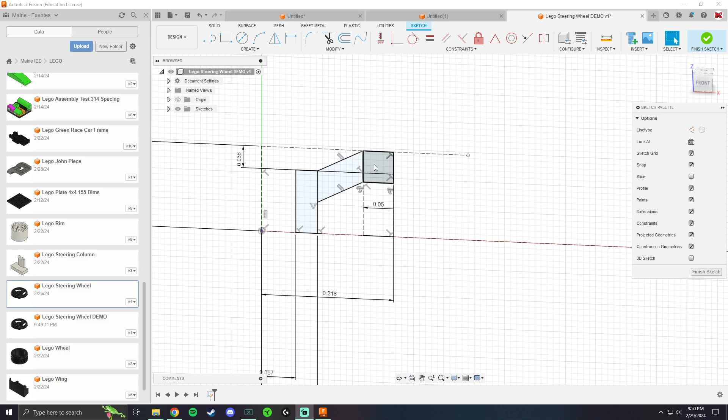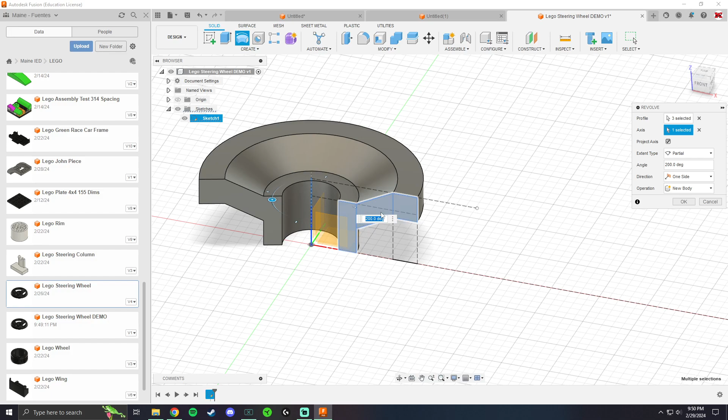So if I hit finish, let me turn my sketch back on. If I go to revolve, I'm going to be selecting all of these as my profile. My axis is going to be that center vertical one. So then here you go. If I rotate this back, you can see all this blue area, it's becoming that. It's giving me the slope, so I can get that bowl effect. Turn this back to 360.

Now, after this, I'm just going to give it a quick fillet. Let's see, on this side, 0.05, perfect. Now, I'm going to be talking about the circle pattern here.

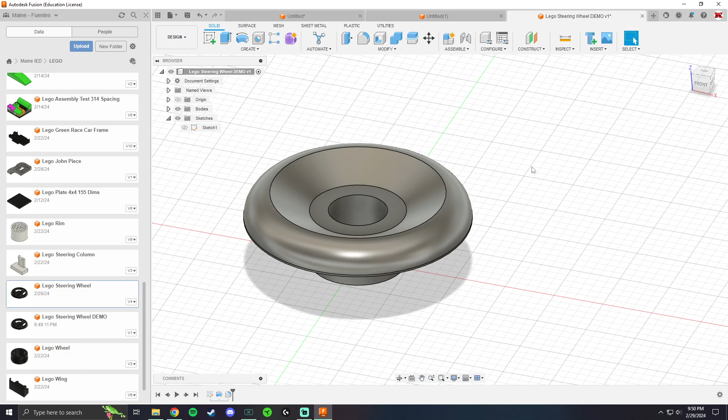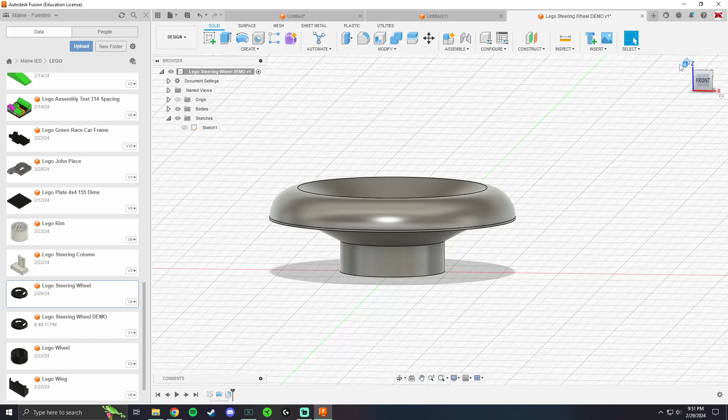So with that steering wheel, there's kind of three sections that are cut out to resemble a real steering wheel. Now we could do this on either side, bottom or top. And all we're going to do is kind of cheat the system. Basically, we're going to just make a profile, a sketch that's perfectly flat here at the top and just cut down. So I'm showing you a hack to cheat the system, but also using the circle pattern. Now, I'm a big fan of using it on the bottom because I think it's a little bit cleaner, but feel free to do what you want. There's no right or wrong way.

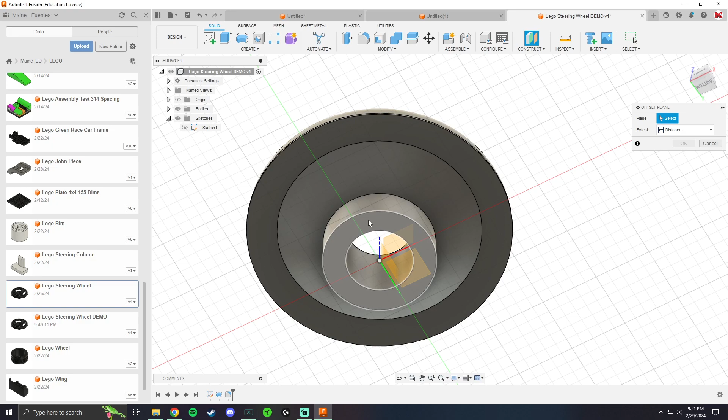Now I can do one of two things. I can definitely make a sketch and go right on here. But I think to really help us visualize this, I'm going to make a plane. So if I go to construct, I'm going to do offset plane. I'm going to click here on the bottom. I'm not going to move it off or anything, I'm just going to put it directly on 0. Now I'm going to rotate down to the bottom. I'm going to extend this all the way out. Just like this. Go ahead, create a sketch on the plane.

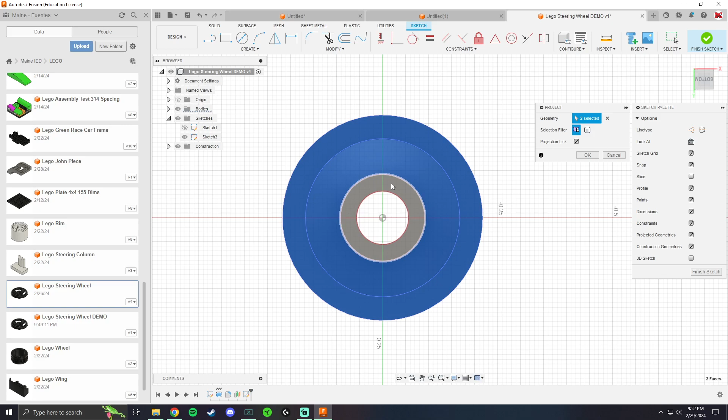Now I'm working, again I'm going to use my P tool, projection tool. I'm going to project all this geometry. So when I rotate here, you'll see in a second. So all these diameters are known to me on that plane that is on the bottom. So I'm going to go back here. All I'm going to do is make a line that's going to go vertical. This is kind of like my starting point.

So I'm creating 3 different slots. You'll see in a second, I'm going to create some lines here. I don't really care what these distances are because I only care about this slot here. Now, these are blue, we do not like blue lines. I'm going to put in a degree. For my demo piece, I didn't really calculate anything from using a dial caliper, I just went with 42 because I thought it was a pretty decent number. So I like 42 here.

And then the space that I'm looking for to then actually cut is going to be these 2 patterns right here. Now I could definitely just make another line, do some math if I wanted to, but why don't we let Fusion do the math?

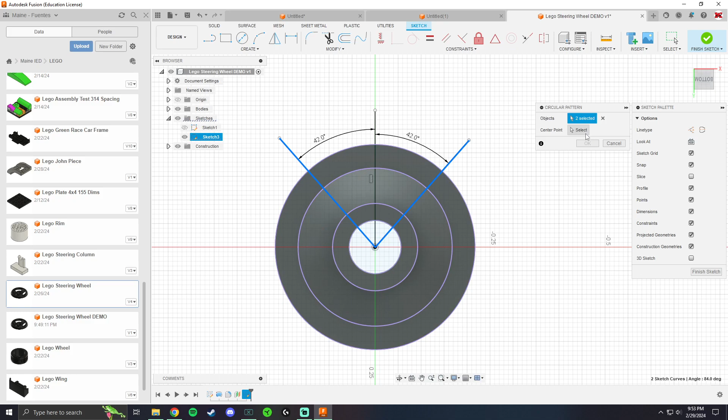So come under create, circular pattern. I'm going to do a circular pattern of these 2 pieces, my 42-degree lines. My center point is going to be the center of my circle right here. And then now, quantity 3, definitely could change to 4, but 4 is going to be a little bit of overlap. If you want 4, just change your angle, make your angle smaller. Now, 3 is perfectly fine.

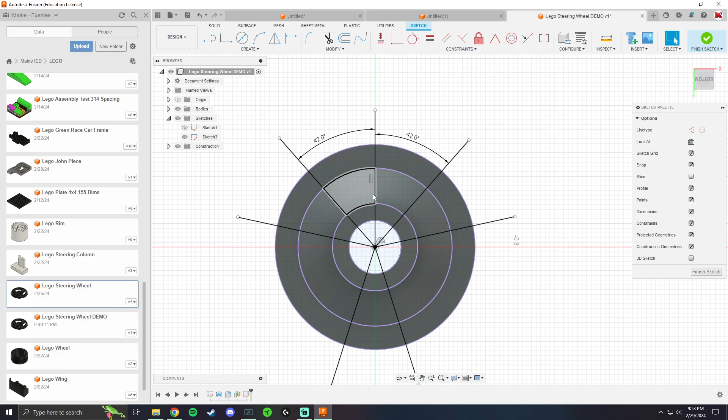Click OK. Now I have this as 2 because it's split basing off this vertical line, which is fine. I have 1 here and then 1 here. So I have these small areas connecting the wheel. Again, if I want to get rid of the small ones, I get rid of the small ones, get rid of the big ones, get rid of the big ones. Again, no right or wrong way for doing this in Fusion with your steering wheel, but I'm just giving you the options.

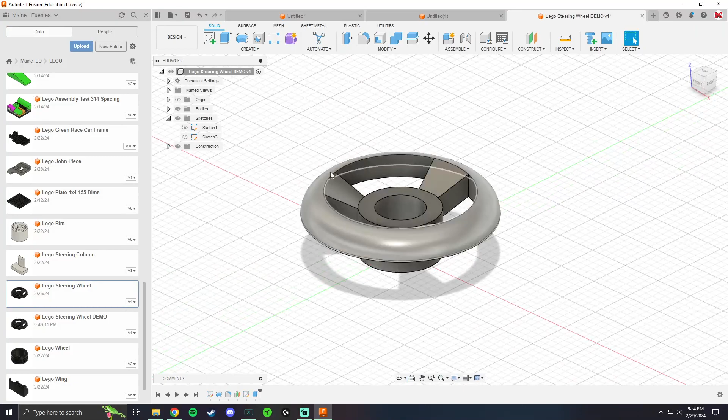Now let's finish sketch. Let us go ahead and extrude this now. So I'm going to extrude these 2 together. The next large one, I'm going to have it cut all the way down. So now you can see that it's making that 3-section piece. Click OK. Now when I rotate this around, you can see you have 2 sections cut, you have that taper there that we made from our revolve. And then there you go, there's your finished steering wheel.